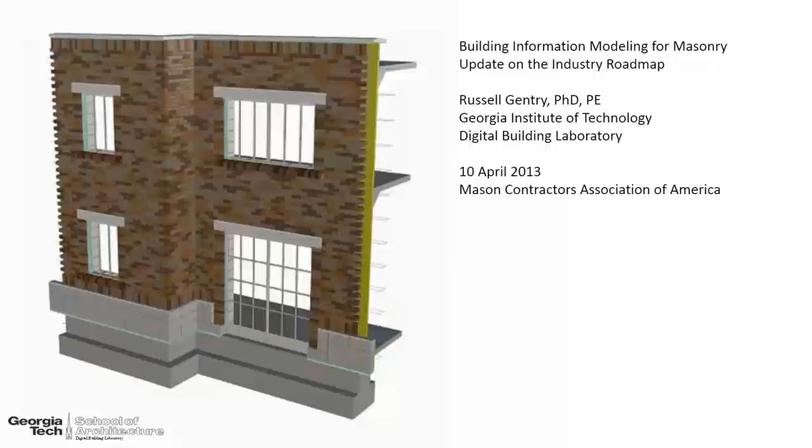I'd also acknowledge the support and oversight of my colleague Chuck Eastman here at the Georgia Tech Digital Building Lab. Chuck has been working in building information modeling and allied technologies for over 30 years, and he has overseen many of the projects that have brought the technology to where it is today.

As people who put buildings together, who make masonry buildings happen, we're familiar with architects' drawings and intentions about masonry, but recognize that there's a lot going on behind the scene. I think the same is true with building information modeling. We can think of all the drawings we're used to getting and all the aspirations people have about their masonry buildings, but none of those drawings and none of those aspirations fully represent what's going on behind the scene—what it actually takes to put a masonry building together.

Our project is really to listen to you and understand the frustrations with putting masonry buildings together, with documenting them, with managing the flows of men and material on job sites, and to the degree possible, embedding information in software in a reusable way so your job will be made easier and you can remove uncertainty from your projects. You know when something's going to happen, where something is, where your people are, and what they're doing. Those questions can certainly be assisted in a BIM environment, but they're not done so today.

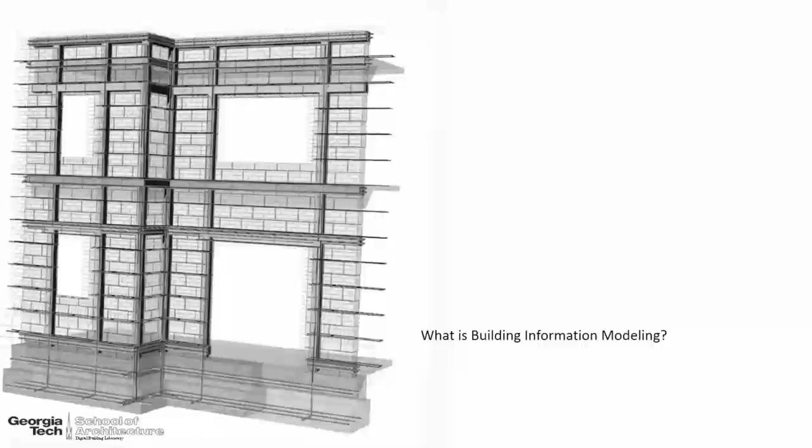So I'm going to take a minute and go over a few definitions. I know these definitions are technical, but unless you're comfortable with what BIM is, you're going to have certain misconceptions about what BIM is and what BIM isn't.

The process of BIM modeling is really the process of linking all of the information that you use—whether it's technical information about your masonry units, about where they are on the job site, whether they're still in manufacturing, or whether they have some kind of lead time associated with them. The BIM process is about linking a model together that contains all of this information you need to construct a masonry building, and the building model is the actual data repository.

I think it's more than just Revit. In fact, Revit is a tool used primarily by architects and engineers to build the modern day equivalent of contract documents. The BIM model you use may contain Revit or may be partially built by Revit, but it's more than that, because a proper BIM model contains information about scheduling and materials, and at current time, that information is not embedded in Revit. Revit is a great tool, and part of our support here at Georgia Tech comes from Autodesk, so we don't speak ill of them in any way, but it's important to recognize that BIM is an umbrella set of technologies that are more than just one piece of software.

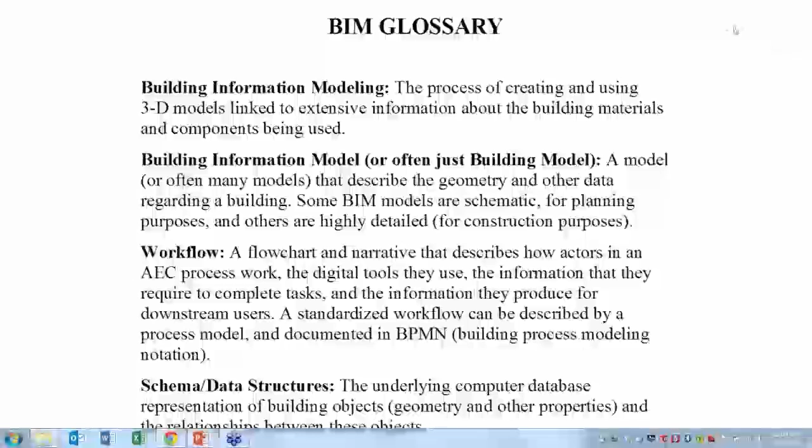Sorry about that, my computer was very slow to advance.

You'll hear a few additional terms that aren't as important. One is interoperability, meaning the data you use in your office shouldn't have to be generated over and over again. The most common example is that architects and engineers put buildings together, but you can't necessarily use that information to do quantity takeoffs and cost estimating, because the tools you use in the office don't communicate with the tools used for quantity takeoff and estimating. So interoperability is a big deal in BIM, and something we're working on in the Masonry BIM software.

3D modeling just means we're going away from flatland plans and elevations, and developing all of this information in a 3D environment so we can view the building as it's being constructed.

Our deliverable here at Georgia Tech, ultimately, to the BIM for Masonry initiative, is a software specification—a set of desires and workflows so that software companies like Autodesk, Bentley, Tekla Structures, and others will be able to develop the Masonry BIM software we hope to be using in a few years.

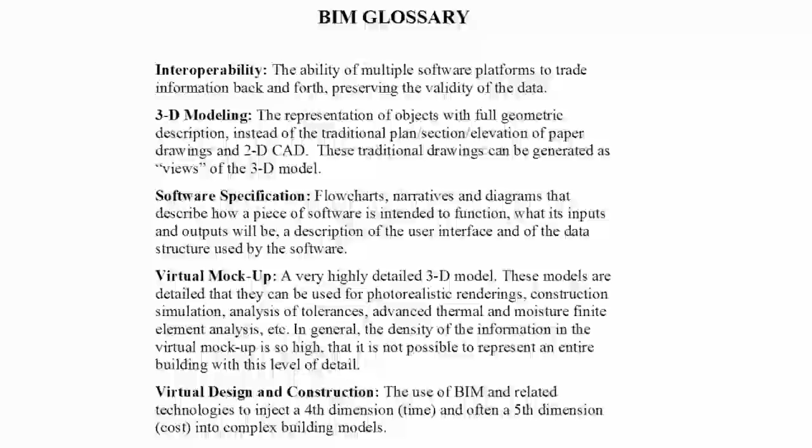Virtual design and construction is a term used to represent all of the 3D geometry in a building, as well as a fourth dimension, time—meaning the model is somehow tied into the project schedule—and a fifth dimension, cost, meaning the building information model is tied into your cost estimate.

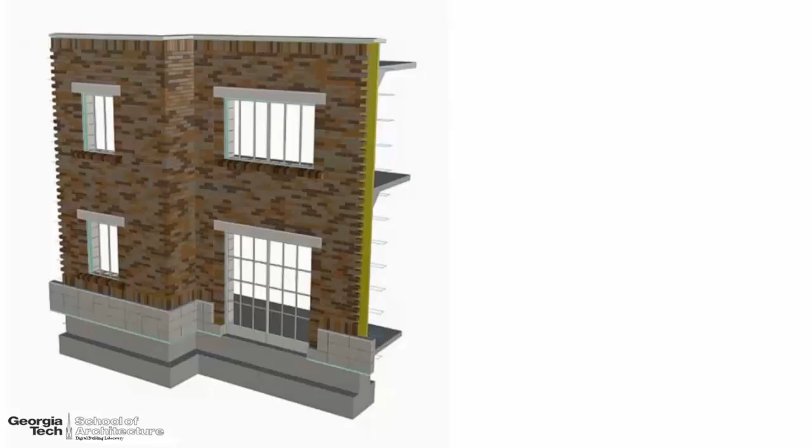Here's an example of a virtual mock-up. What we mean by that is one small part of the masonry building—in this case, we like the idea that a small fragment showing an interior corner, an exterior corner, windows, doors, connections, foundations, an elevated slab, and the parapet condition can all be shown together.

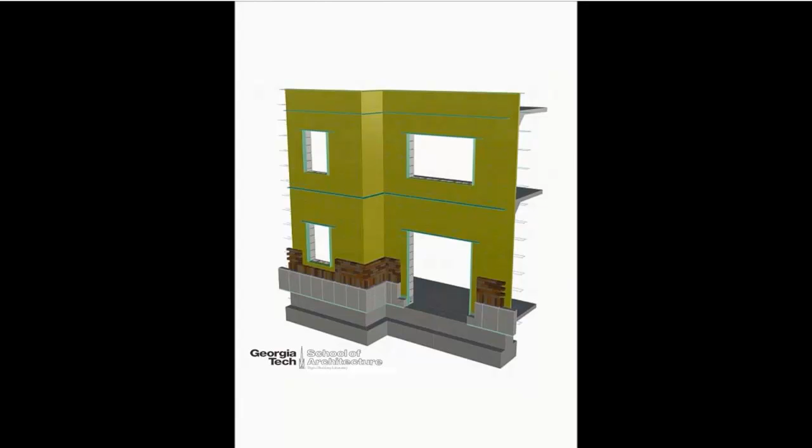Although what you're seeing on the screen now is not BIM, because this rendering was created specifically for this discussion, what we imagine in the future is that when we have virtual design and construction implemented in BIM, you'll be able to select a section of your building.

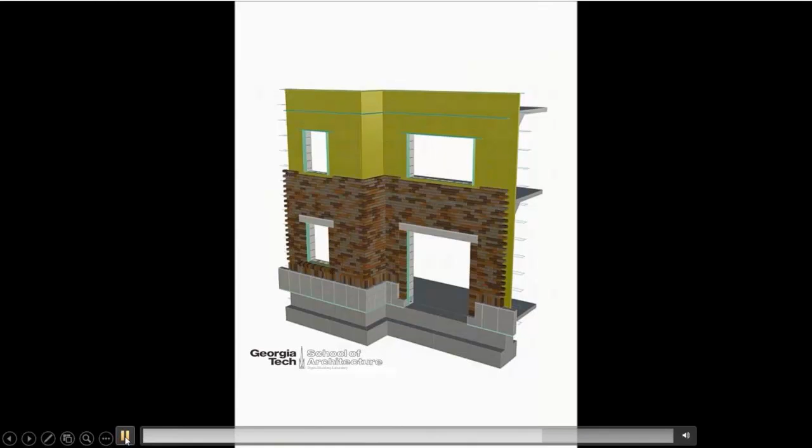You'll be able to have a drawing like this, and you can imagine that on a Wednesday you can show this drawing to your crews in the morning and say, by Friday we need to be here, and by Monday we need to be at the top of the wall. The idea is that BIM is a computational environment in which those sorts of communications with your masonry crews are made possible.

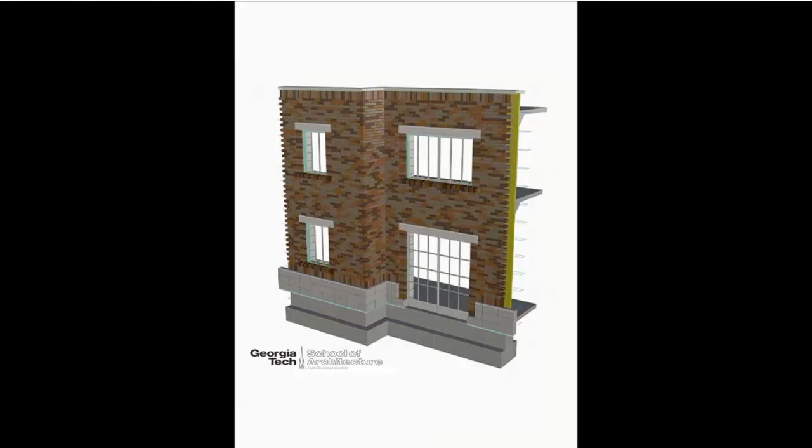So this is just a fancy rendering at this time, but we're developing the underlying data structure for BIM. I'd like for you, as mason contractors, even as we go through this discussion, to write down the things you need—the hardest things you do in your office today or on the job site involving masonry—and how you think this technology might help. That's an important input to our process.

And guess what—we're behind. You've probably heard this: the American Institute of Steel Construction started developing its material system in BIM about 20 years ago.

If you're used to looking at structural steel shop drawings, you'll know that almost all of them are now developed in BIM platforms. This has had a dramatic impact on the structural steel industry. They develop much more complex details and are able to get shop drawings out much quicker than they used to, and make changes much more efficiently than past manual methods.

So we're a little bit behind. Note that here at Georgia Tech, my colleague Chuck Eastman has developed a BIM standard and specification for precast concrete. The precast concrete industry funded the Tekla structure software company to produce a BIM application for precast, which is now widely used in developing precast buildings. It contains all of the double T's, spandrels, and other common precast elements, allowing rapid generation of building propositions in precast concrete. Likewise, the American Concrete Institute now has a BIM committee that meets twice a year developing standards for cast-in-place concrete construction augmented using BIM. So it's good that we're in the game as masonry, but it's not good that we're behind. Part of the project I'm talking about is our strategy to catch up and maybe even leapfrog these other material systems.

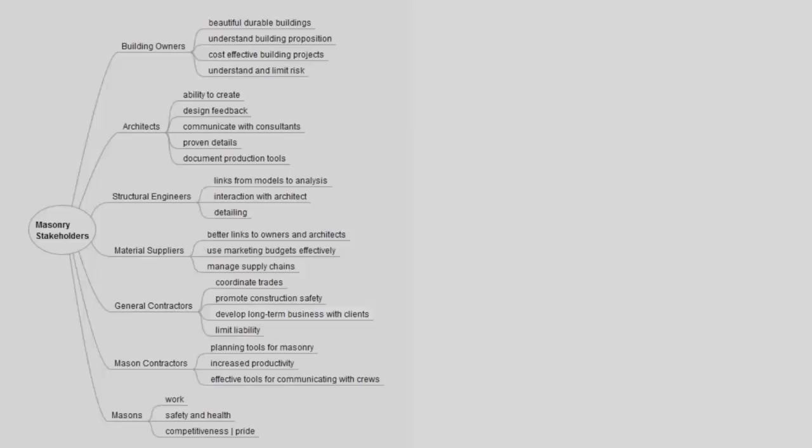On the day-to-day scale, we want planning tools for masonry, we want to increase productivity, and we want an effective tool for communicating with masons. So all of these are within the stakeholder community in terms of needs. I'll talk a little more about this in a few minutes, and I'll discuss some of the other stakeholder groups and what they've asked for, because we're all part of a broader community.

One aspect of masonry construction is that there's an incredible library of masonry types from many different industry segments, and there's no common digital repository of masonry units. If I'm doing structural steel construction, it doesn't matter who rolls the steel—it's standardized, and I know I can get that information from a common database. But there is no common database for masonry units. So one of our activities in the BIM for Masonry initiative will be to develop a format and structure for a common database for masonry units, whether those come from the cast stone, clay masonry, or concrete masonry industry. Ultimately, we expect that same database can be used for custom masonry units, whether a cast stone job or a cut stone job. That's one aspect of BIM that, at least in early stages, primarily involves masonry suppliers.

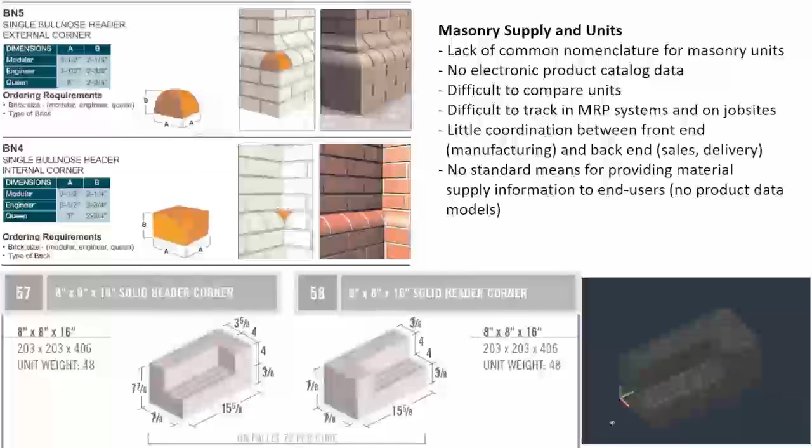The complexity of managing where all those are, where they are in the production chain, where they belong on the building, is a task that would certainly have been enabled by BIM.

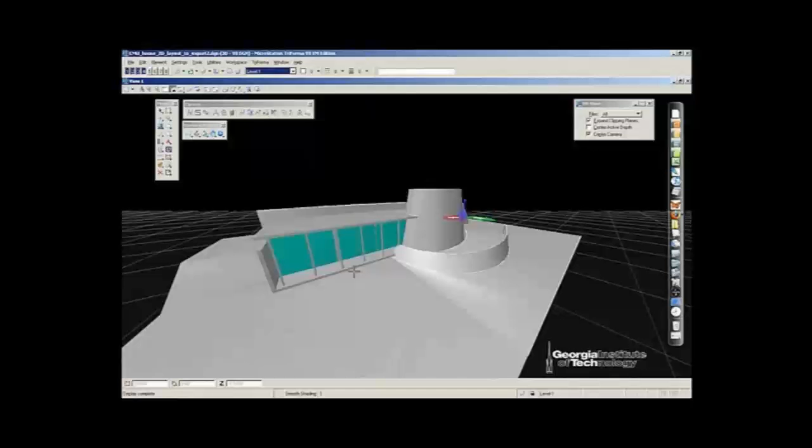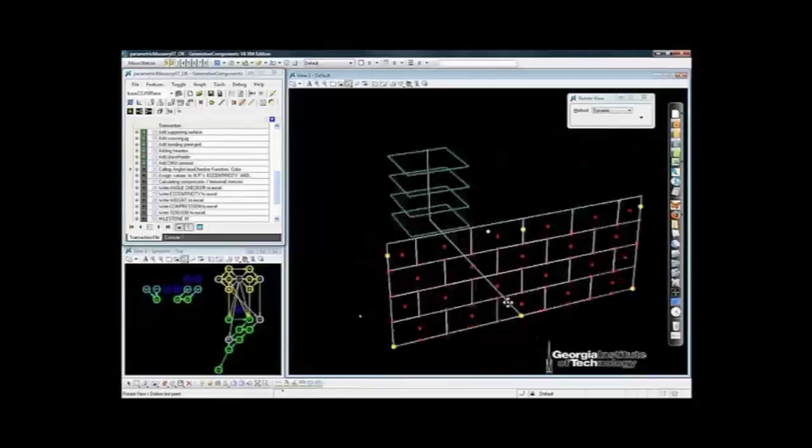And so we know about architects' processes with BIM. Architects were the first to embrace BIM because the architecture environment is all about building modeling. But when you take the kind of building form modeling and you overlay on top of that a BIM system...

What you see here in the BIM system is a prototype we developed about 5 years ago for the National Concrete Masonry Association. What you see is that the BIM system understands a concrete block wall in running bond. The earlier model was just kind of a form model used by the architects.

So the kind of challenge we have is, how do you integrate detailed construction information about wall systems with what architects do in their normal process.

As an aside, I teach in this area here at Georgia Tech, and can say that over the last 20 years, the structural engineering knowledge of how to design load-bearing masonry structures is waning, sadly. These initiatives to bring these tools back into the software in an integrated environment are very important.

Structural engineers are also involved in wall detailing, and due to changes in seismic codes and perhaps a lack of knowledge about masonry construction, load-bearing walls are ubiquitously reinforced these days. It's become much more difficult to do unreinforced load-bearing masonry, and all of this reinforcing adds significant construction challenges, delays, and complexity to masonry jobs.

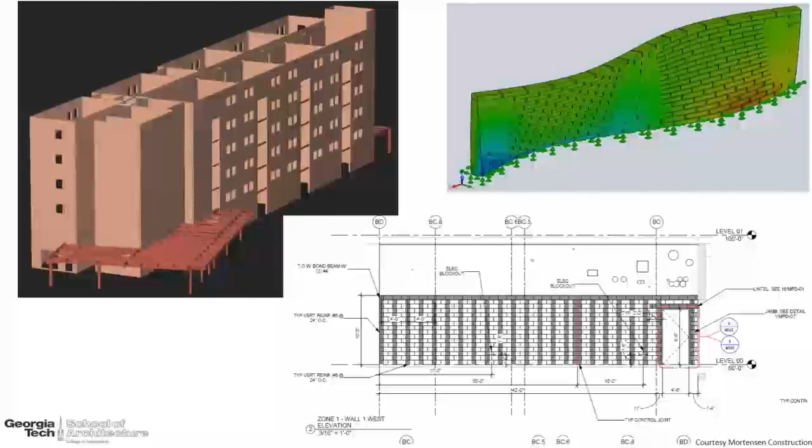So part of our challenge in developing BIM tools is to be certain that we provide you, the masonry contractors, the ability to generate your own shop drawings, as well as to make them useful for you in the field as tools with which to communicate with your masonry crews.

As part of our phase one process with masonry contractors, we developed a survey to ask masonry contractors what was most important to them about new digital tools and construction information technology. You can see the ratings here from your colleagues, and this is a fairly small sample. I'll talk about this later, but if you ask what were the top things mason contractors identified as areas where they need help...

Preliminary or alternate estimates: 90% of those responding identified this. A way for the contractor to communicate with the architect. 100% identified detailed material takeoffs and cost estimating.

Why do I have all of these architectural and engineering drawings, and I can see that all the masonry is in those drawings, but I can't use that at all in my estimating? Shop drawing production, 90%. Production planning, including crew sequencing and scheduling, 100% of those surveyed identified this as a key component of masonry BIM.

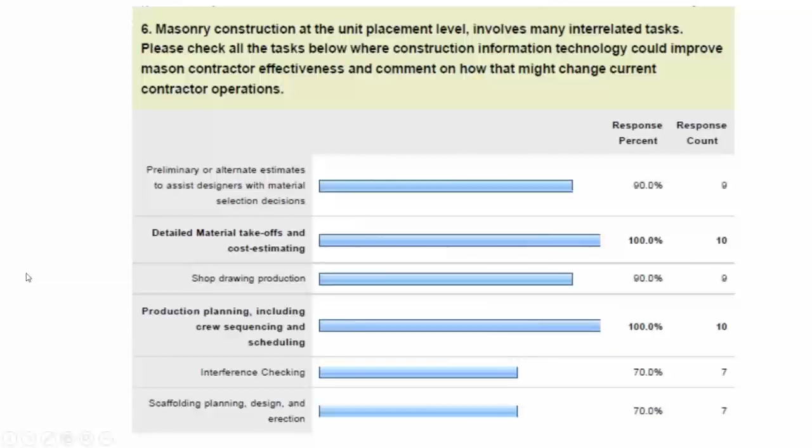This is a continued slide from the previous page. The lower numbers represent areas where contractors were not as interested in including these technologies in BIM. Only 50% identified shoring, 70% material delivery. For complex detailing at masonry interfaces, 100% of those surveyed said this was an issue where BIM could help.

This is really the role of our virtual mock-up. We're going to develop incredibly intense details of masonry buildings at the interfaces between floors and walls, walls and roofs, walls and other structural systems such as precast, cast in place, and structural steel, and finally coordination with MEP.

This survey was preliminary. We reached a rather small audience of contractors who came to Georgia Tech last year and helped us understand the mason contractor perspective as we developed this idea of building information modeling for masonry.

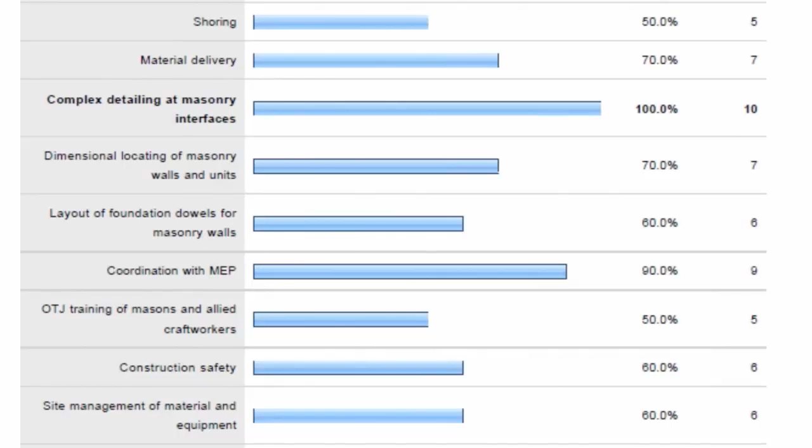As we move ahead this year, I want to talk about a project in a few minutes where we're going to need more of you to participate, a larger segment of the mason contractors industry. So let me talk again about more of your tasks and how BIM might help.

Many of you recognize this snapshot from Tradesman Software. I'd suggest, from talking to Bill Pacetti, that he has between 50 and 75% of the market share of major mason contractors. They have incredible interest in our project because they want to tie their software to the earlier models created by architects and structural engineers, and the way to do that is through BIM.

What I'd highlight here is this little code - you're starting to think about what I'd call data schema. Here's a code that says U325SB, and this is a certain brick coursing in this building that they've generated, a fairly complex building. It's done a great job of counting all the pieces - the Tradesman software does that.

But this is only because the mason contractor completely remodeled this building within Tradesman. Underlying this is the traditional architect's drawing, which would now probably be provided in BIM. So the question becomes, why spend the time, money and effort to completely remodel this building in Tradesman and map these funny codes, U325SB, onto the building, when the architect could essentially be building this model for you as part of his design process? That's the whole promise of Masonry BIM.

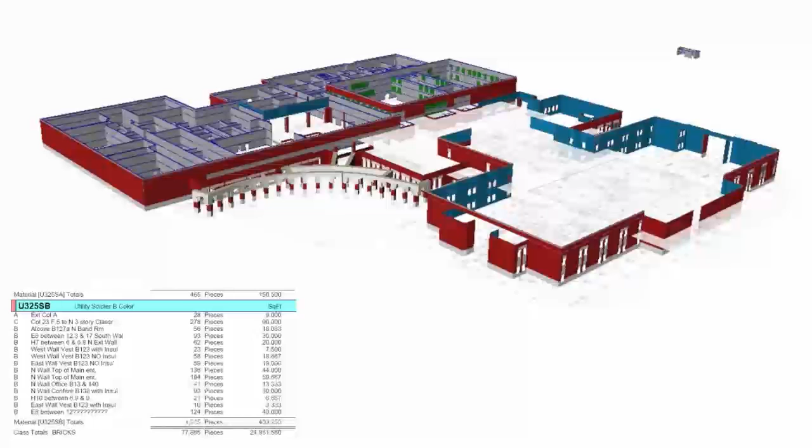We're all familiar with the construction process of masonry buildings and how it's somewhat incremental through a process, and how masonry crews are always getting moved around on job sites. This is an example I generated to discuss some of the masonry tools we're envisioning for Masonry BIM - in this case, a project scheduling tool.

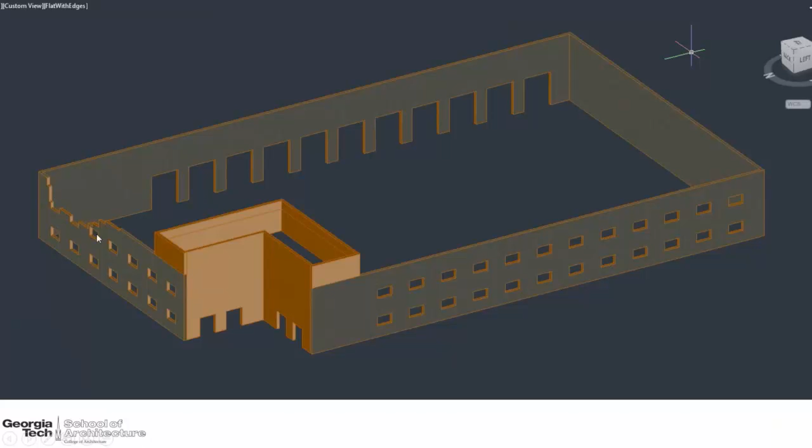How much longer is it going to take to complete this fraction of the wall? What's missing? What masonry units are missing? How many crews? What scaffolding is needed on that side of the job site? Is that scaffolding already on the job site, or is it back in your boneyard at your home office, or have you got to rent it? If you've got to rent it, how soon can it be delivered?

Many of you are probably familiar with RFID tracking, and so it is. We have a colleague here at Georgia Tech who I'm working with to establish RFID tracking for things like the scaffolding itself and masonry units as they're delivered to the job site.

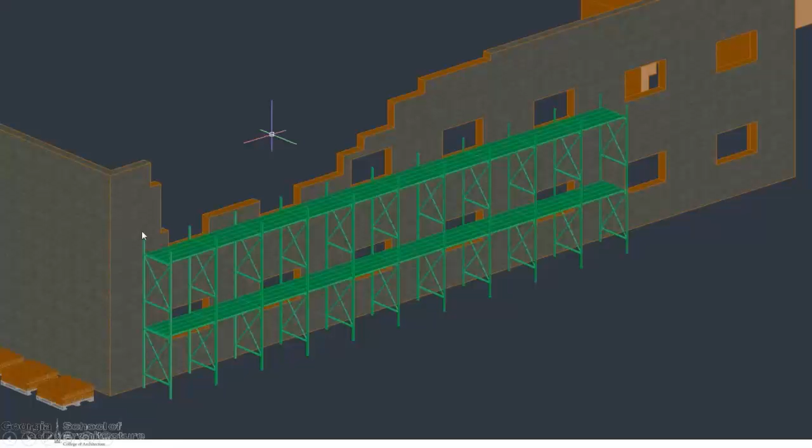You can imagine in a modern-day BIM system that when masonry gets delivered to the job site, you'll be able to understand when it was delivered, where it was delivered, how much of it was delivered, and there'll be an electronic transfer of information from the masonry supplier to you when that material is delivered.

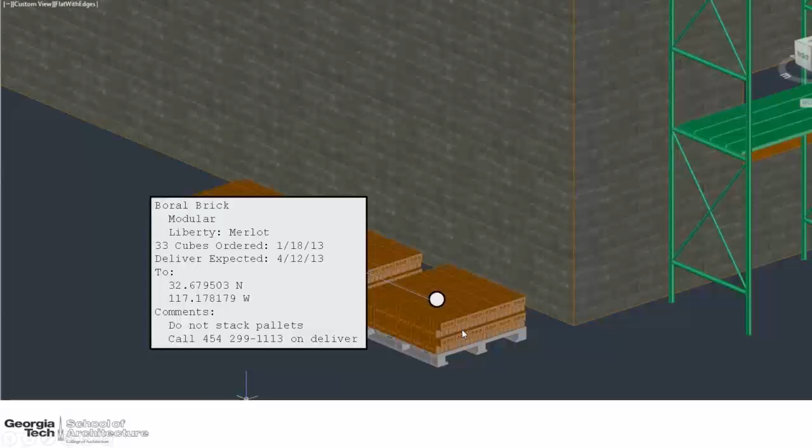As an aside, I'm starting a project with some colleagues here at Georgia Tech, looking at alternate modes of masonry delivery so that masonry can perhaps be delivered right onto the scaffold instead of having to be put on the ground, broken up into smaller units, and then transferred up to the scaffold.

Another potential for Masonry BIM is identifying all the long lead time items and specials on a job site. So if you have cast stone lintels on a job site, it would be good to know how many of them, how many different types, where they are, and when you expect them to be delivered. In this example, we have cast stone lintels over the high bay doors, which are probably too heavy to be lifted into place from the scaffold.

So you've got some construction planning to do based on the arrival of these lintels to the site that you need to accommodate within your process. The scaffolding might be in the way of the lull or whatever you're going to use to lift them. Part of our process is to help you with masonry planning tools that can help facilitate these sorts of operations.

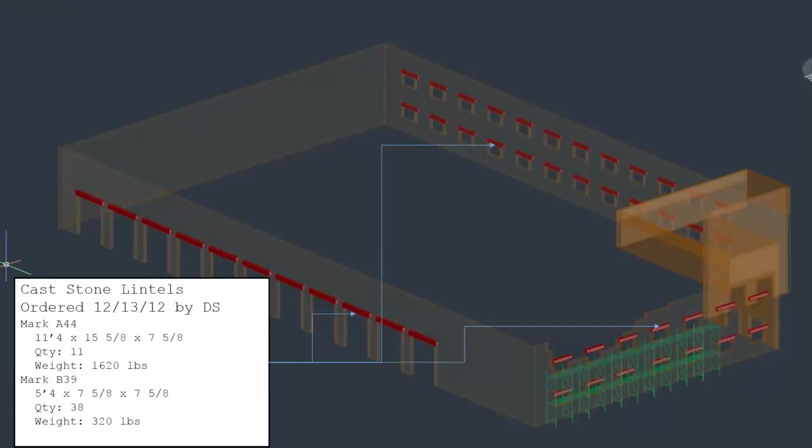Finally, if you think about wall bracing and safety zones, we know that after certain masonry construction operations, parts of the job site have to be blocked off or roped off for a period of time while the wall's curing, and you've got to install bracing during those times.

It would be good to be able to communicate with your general contractor and the other trades on a day-by-day basis what you're planning to do, and also to use these tools as a what-if, a gaming tool, so that if you've got to change the order of construction because of unintended material delays or other conditions on the job site, you can accommodate that.

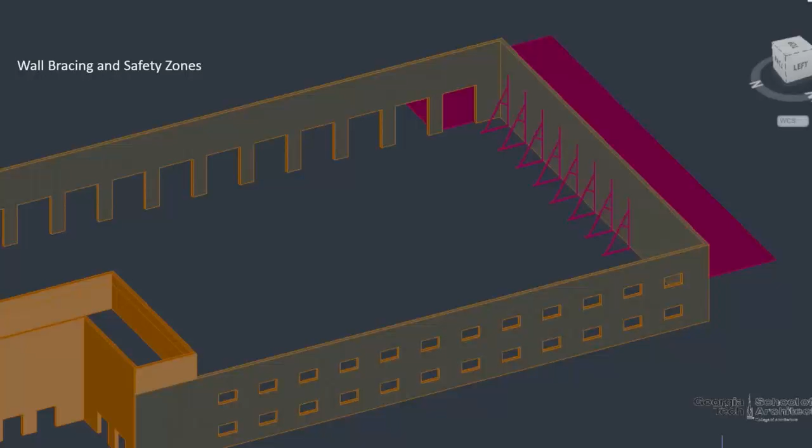Finally, shop drawing production—we've kind of talked about that, but that's another tool we imagine embedding in Masonry BIM.

Let me talk a little more about virtual mock-ups, and some of these examples come from colleagues at Mortenson Construction. I'd like to acknowledge them for sharing these. They do a lot of what I would call custom drawings for their masonry buildings. They don't have masonry BIM per se. What they have done is developed and hired a staff of essentially architects who can create very convincing and detailed drawings, redrawing parts of structures fully in 3 dimensions to facilitate the construction process. They refer to this as virtual mock-up and also virtual design and construction.

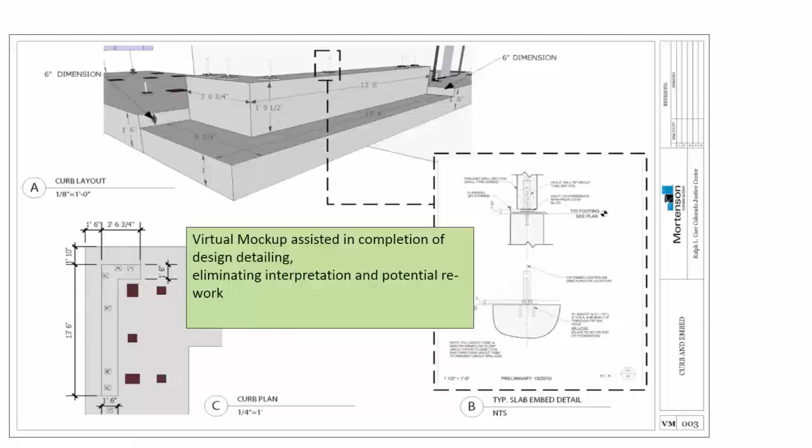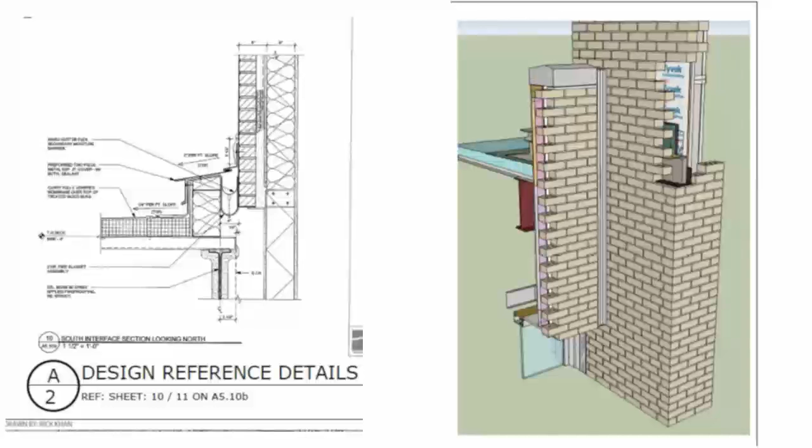In this case, what Mortenson did is they had someone draw this, and from my own perspective, being a SketchUp user myself, I would imagine this is a 4 or 5 hour drawing right here. So you know what you pay your CAD draftsman an hour—that's what they invested in drawing this, but clearly they felt it was worth it in terms of communicating to the various trades on the job site.

Again, the advantage of models like this is that we can actually show time-lapse construction, so we can show our people on the job site exactly what needs to be done on a given day and in what order, and that's really important. Finally, I think you can imagine tools in the future where we can extract information from BIM and beam it right to our people on the job site.

Those of you who know David Biggs may have heard him give a presentation on this technology. It's coming—you can imagine being able to put masonry information right on small devices like iPhones. Imagine we had an application on the job site called Masonry Finder, and everything on your job site was RFID tagged, not to the part level, but at least to the bin level. So anything that was missing could be identified using an app on an iPhone or other portable device.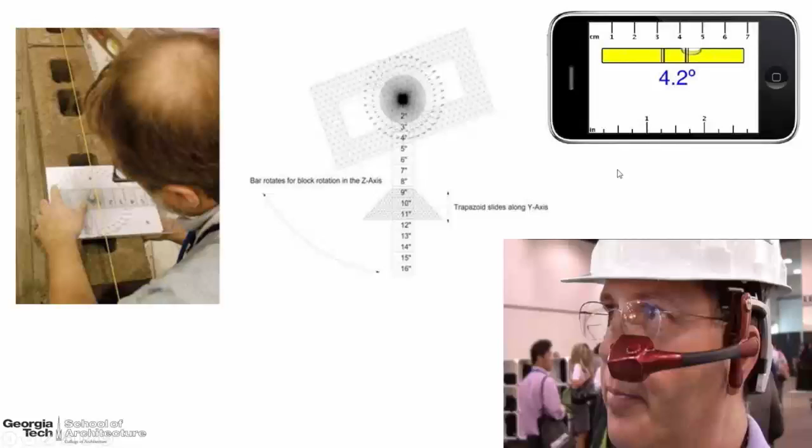So this is really the function and the reason for our BIM roadmap. We want to get to a place where architects, contractors, engineers, masons, our whole community, masonry suppliers, can benefit from a more integrated industry. What is great about the BIM for Masonry initiative is there's nobody who doesn't want to play—everyone's interested in the technology, everyone sees a benefit in participating.

Many of the parochial challenges that often happen in the masonry industry, let's say clay masonry suppliers versus concrete masonry suppliers, are erased in this initiative because we recognize that everyone is going to benefit from a more streamlined design, procurement, and production process in masonry construction.

We've got all of you today participating, and I greatly appreciate Jeff Buczkiewicz and Tim at MCAA and their support of this project. We've worked closely with Ed Davenport, a leader of your organization, who's given us many challenges to think about. We also have the concrete masonry suppliers, the clay masonry suppliers, the Bricklayers Union, and the Masonry Society as part of the team. We're fortunate to have everyone's perspective and support, and we're positive we're going to make great strides for the industry as a whole.

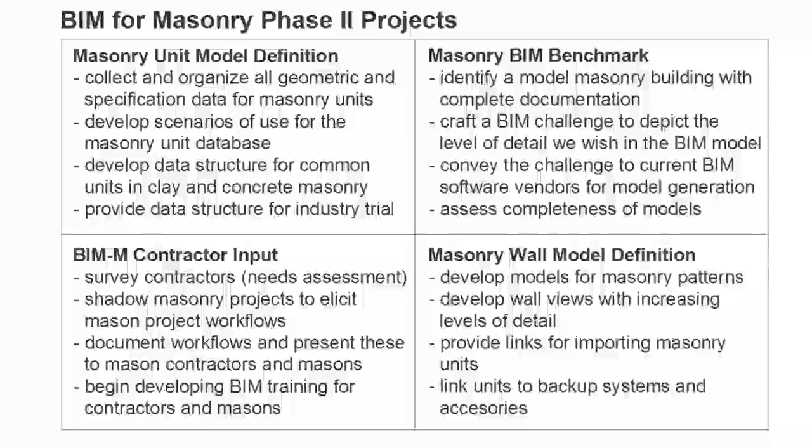But let's go quickly and now talk about this contractor task as we wrap up, because again, what I'm trying to do today is encourage you to become part of that project. I think I've said enough about the four projects in my previous slide, so let me go right to the Mason Contractor Project, and I'm going to go into detail about what we're going to be doing.

We're going to revise and resubmit the survey that I showed you earlier to a wider range of mason contractors. So I'm asking Jeff to encourage all of you on the webinar today, as well as your colleagues, to provide your input. What are your aspirations for Masonry BIM?

The second task is to identify best practices of BIM in non-masonry subcontractor areas. Other subcontractors, like mechanical contractors, curtain wall contractors, and structural steel subcontractors, are already using BIM, not as a side part of the project because it's a contract requirement, but essentially to do their work, and it's making them better, faster, stronger. That's what we want.

So we will be piggybacking our ideas for masonry BIM on top of what other subcontractors are doing. This third task, I'm soliciting input from you, but we also need input from general contractors and construction managers. Ed Davenport has done this with me more than once. It's important for you to tell us what you're hearing from general contractors and construction managers. What perceived problems do they have with masonry construction, and how can we use BIM to address those problems? This is important because at the end of the day, we want this project to generate more masonry buildings.

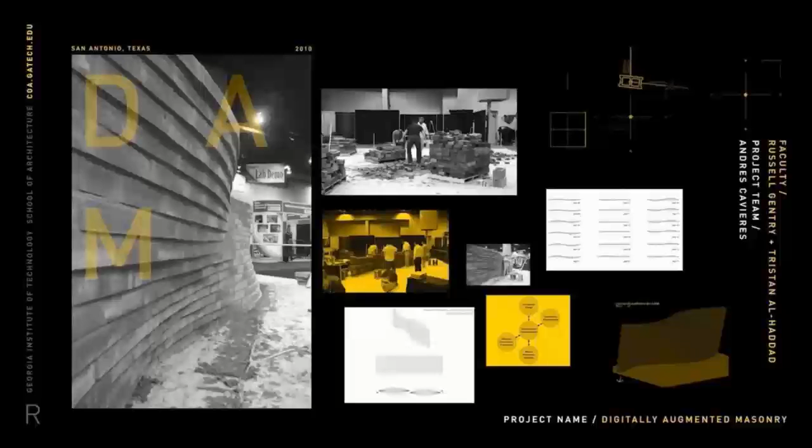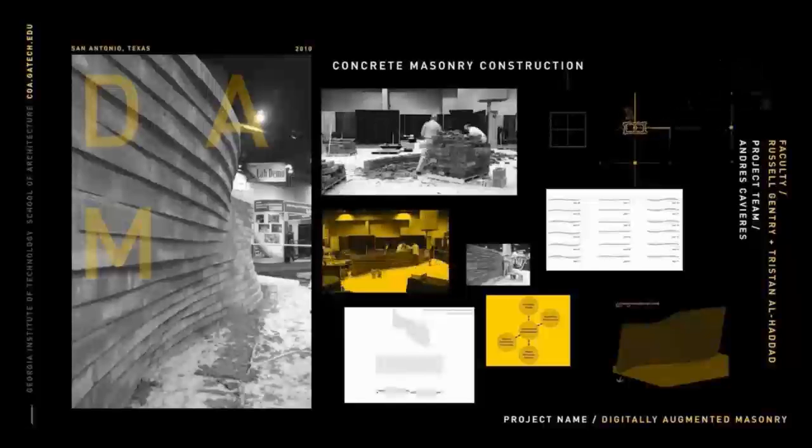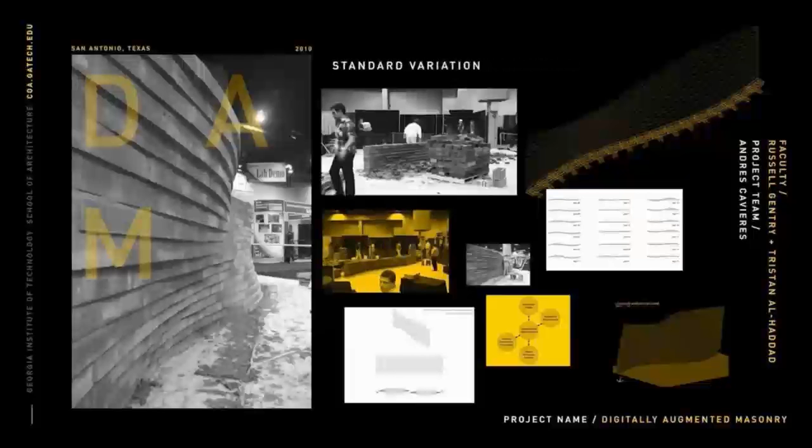So we're wrapping up here now. I appreciate all of you listening in, and I'll make a final plea that this is not something we at Georgia Tech, or even the overall BIM for Masonry initiative, are doing for you. It's something we're doing with you. Without your expertise and input, the BIM tools we develop will certainly be of use to architects and engineers, but we feel these tools will have the most impact on the contractor side, because architects and engineers are already using BIM with all those other material systems. So we want to provide the tools for masonry to get them excited about masonry BIM, but also to make your work easier, faster, and smarter.